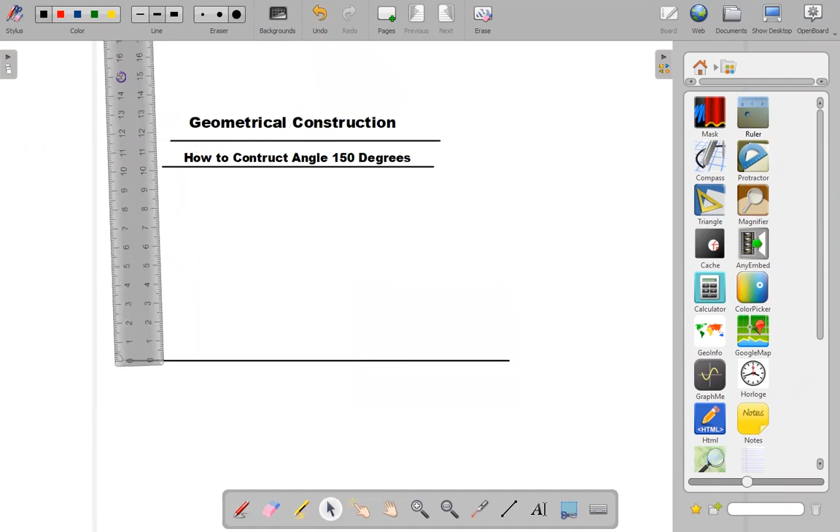The reference point is where we want the 150 degrees to be. So with my ruler, I'm going to make a reference on this line. This is a reference line. Now with the steel point of the compass on that reference, I'm using a digital compass here. If you are using a real compass, yours is going to open and close like scissors, whereas mine is

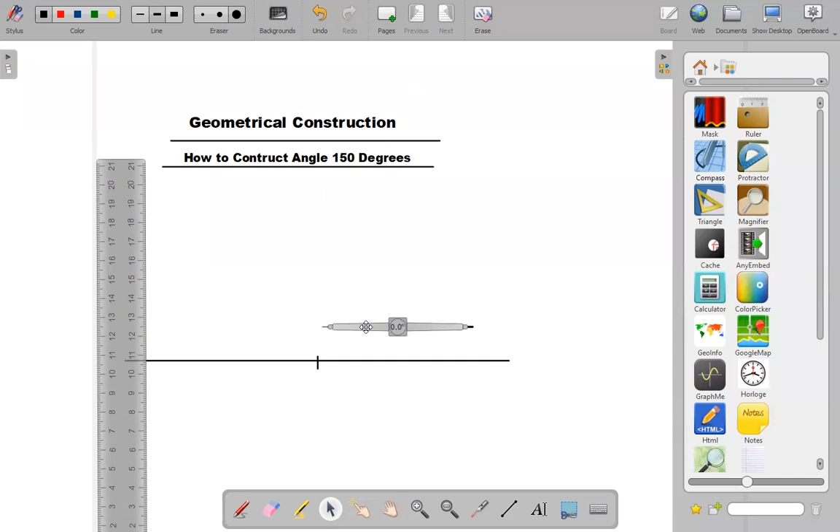a straight line, kind of. So when I say steel point, I mean the metallic point of the compass, while the pencil point, I mean this part of the compass, that is the point where you have the real pencil on your compass. So with the steel point placed on the reference line, you may turn this compass so that I can have a clearer view of the steel point. Okay, that is it right there.

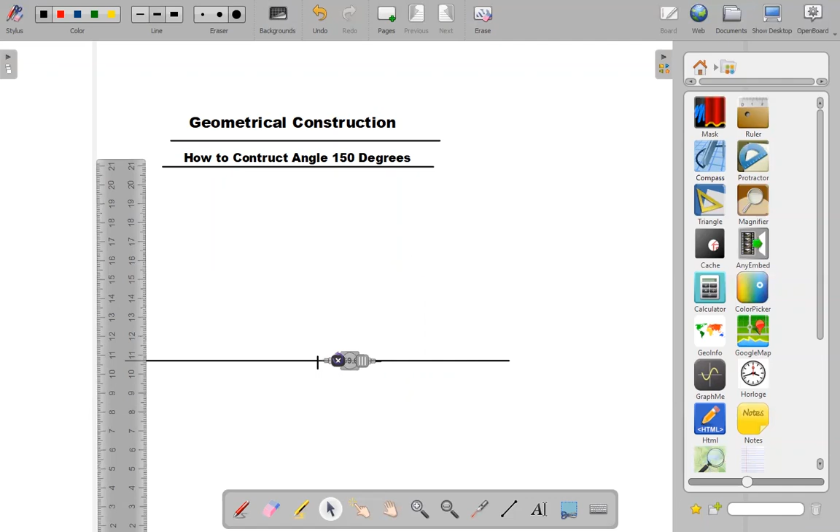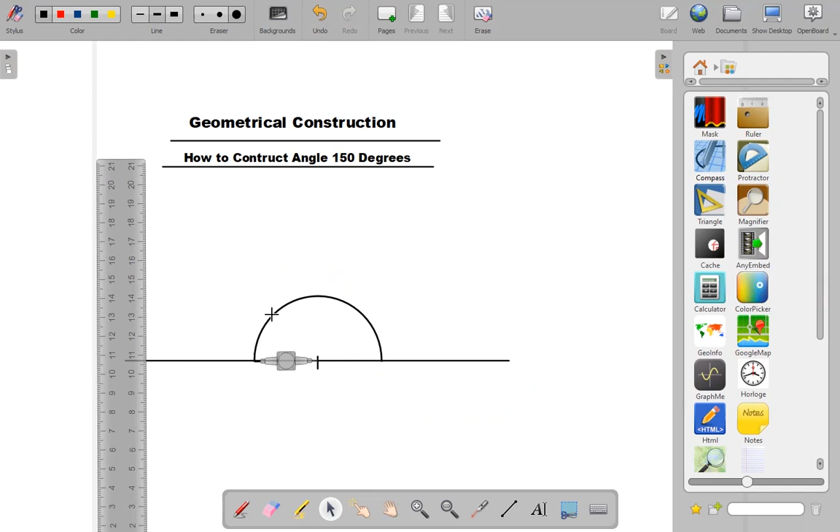We're going to make an arc. Now I'm decreasing my compass here. In your own case, you need to open it up since the compass in its natural state is closed. So you open your compass, the pencil point, to a convenient radius. Then place the pencil point on the line that we drew earlier, this horizontal line, and make an arc like this. Okay? This arc that we made is, of course, 180 degrees, that is the angle on a straight line.

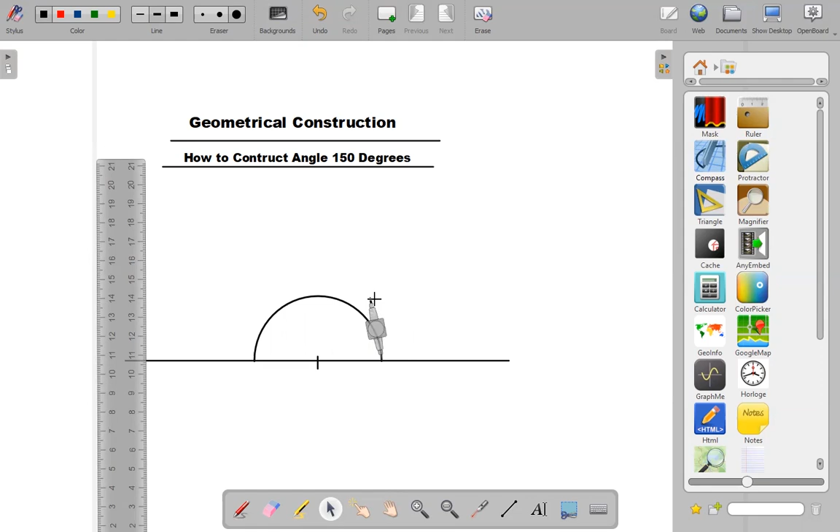Now with the same radius that we used in making this arc, we take the steel point of the compass to this point where the arc meets the line. Place the steel point there, and let me shift it so I can have a clearer view. I'm going to divide this arc with this very compass. Make sure you do not close or open your compass. With the same radius we used in making this arc, we're going to cut this arc into three different divisions.

This cut here, if I join a line to it, will give me 60 degrees. If I make another cut with the same radius of the compass, that is another 60 degrees. And the remaining one will be 60 degrees. Let's do that. So I will place the steel point of the compass here now. You need to get a real compass and follow along if you really want to know this. You place the steel point of the compass where these two arcs meet and make another arc.

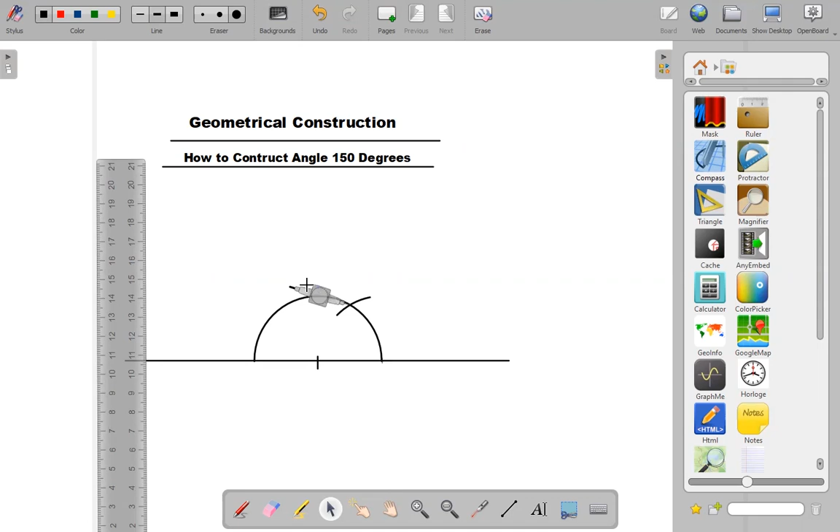Let's make another arc on this line. That is another 60. So 60, 60, 60. Of course, 60 times 3 is 180, which is the angle on a straight line. So now we want to construct angle 150. If I add this 60 to this 60, that is 120. Therefore, to get 150, I will just bisect this remaining 60. When you bisect 60, it gives you 30. So 30 plus this 120 will give us the 150 that we need.

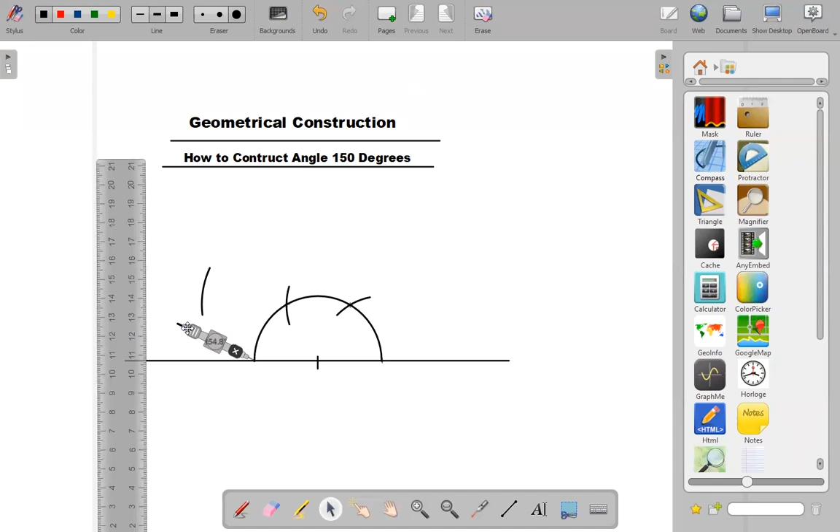So place the steel point here now. We want to bisect this remaining 60. We can extend the pencil point this time around so that the arc I want to make can easily cut. So we'll make an arc here. I want to bisect this 60 degrees. Make an arc. Then take the steel point to this place and cut the previous arc. Now that we've cut the arc, we can join that point to this reference point.

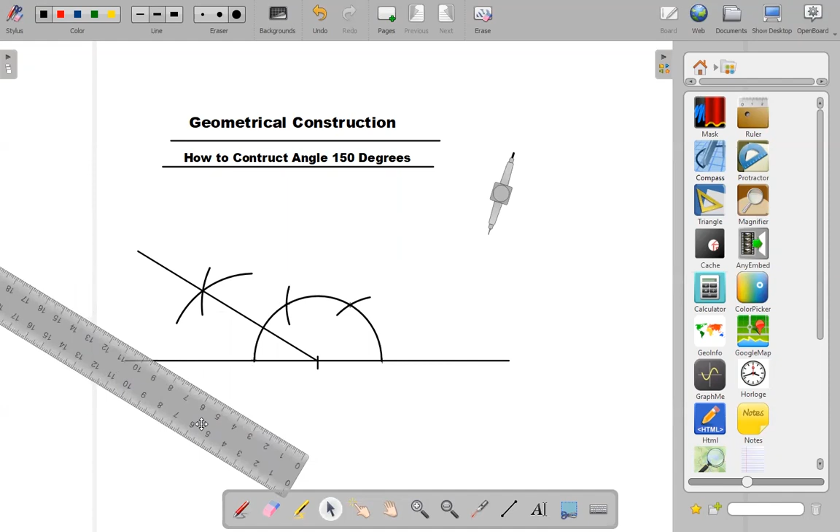Here with a ruler, we join that point, the point of intersection of this arc, to this reference line. And that is it right there. To confirm it, we use a protractor and measure whether we actually have 150 degrees.

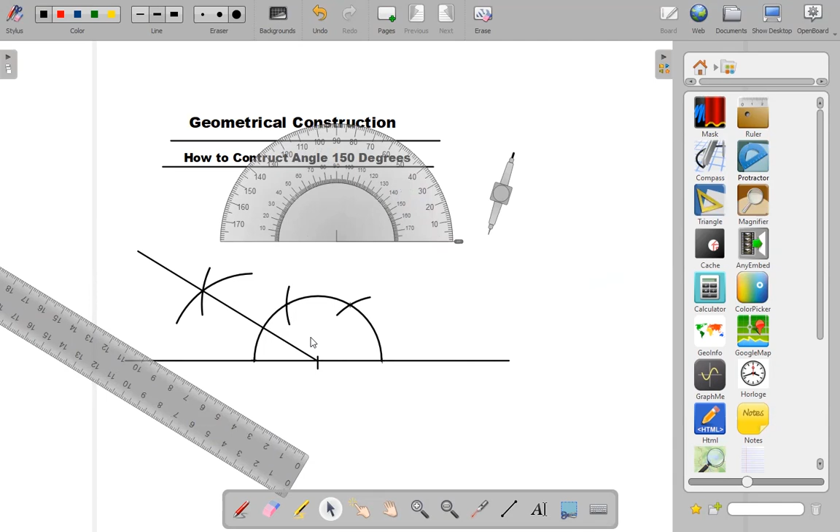To use a protractor to measure an angle, the baseline on the protractor must rest on the baseline here, which is our reference line. Then the vertical line on the protractor must also rest on this vertical line. And then we measure. You can see it there. That is 150 degrees.